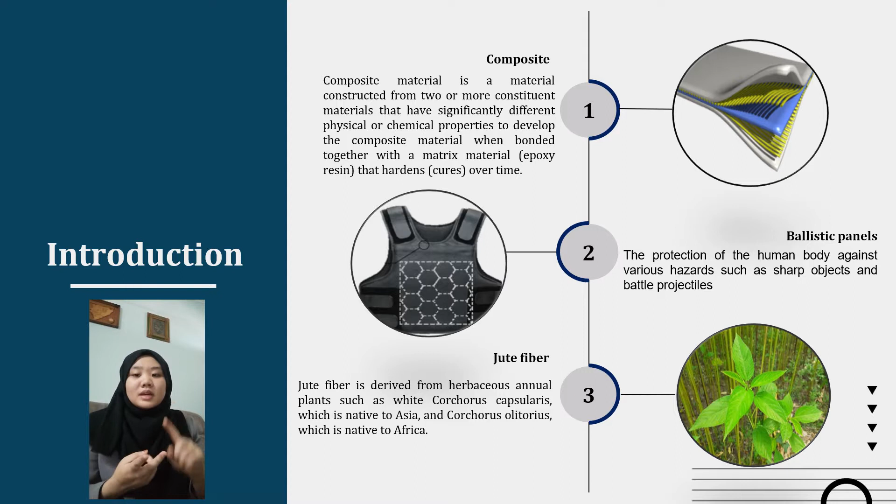Next is ballistic panels. What is ballistic panels? A significant amount of research has been conducted over the last several decades to develop lightweight and flexible ballistic materials for developing next generation ballistic systems, such as body armor with improved mobility and good protection against specific threats. As you all know, ballistic panel is a protection of the human body against various hazards such as sharp objects and battle projectiles.

Okay, next is jute fiber. Jute fiber is derived from herbaceous annual plants such as White Corchorus capsularis, which is native to Asia, and Corchorus olitorius, which is native to Africa. Besides, it is one of the low-cost natural fibers and presently the bast fiber with the maximum production volume. The growth rate of the jute plant is very high as it grows up to a height of 12 to 15 feet in 3 months only.

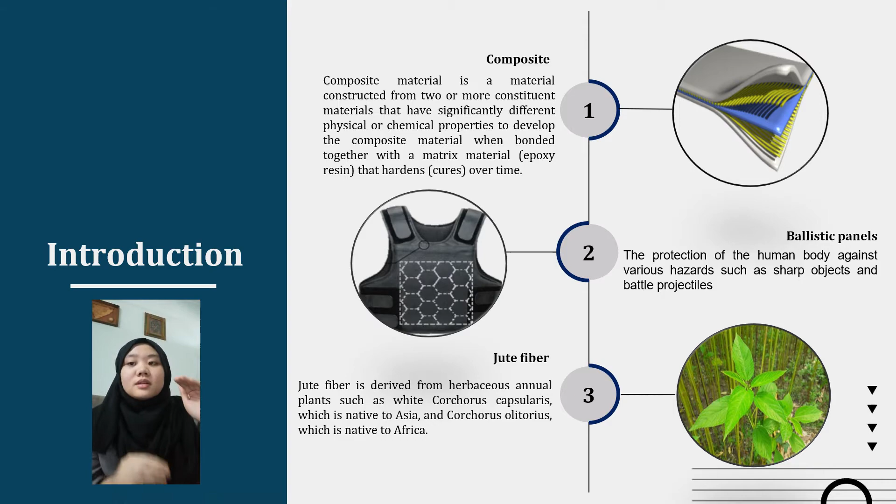Moving on to the problem statement, there are 3 problem statements that need to be focused on for the ballistic panels. First is the high usage of Kevlar fiber in ballistic panels, where Kevlar fiber prices will increase as petroleum prices increase. Second, the number of layers in ballistic panels. In 2022, Firouzi et al. posited in their research that generally 30 to 50 stacked layers of high-strength fabric are required to meet typical ballistic body protection levels.

There is also research by Ojok in 2020 stating that 96 layers were created to trap the bullet. 50 mm of aramid fabric thickness was required, which was substantially greater than the thickness required to stop a 7.62 mm bullet at the given speeds.

Lastly, lack of hybridization of synthetic and natural fiber. In 2018, Safri et al. asserted in their research that the hybridization process is one of the most common and effective methods for improving and strengthening composite materials performance in high velocity impact application.

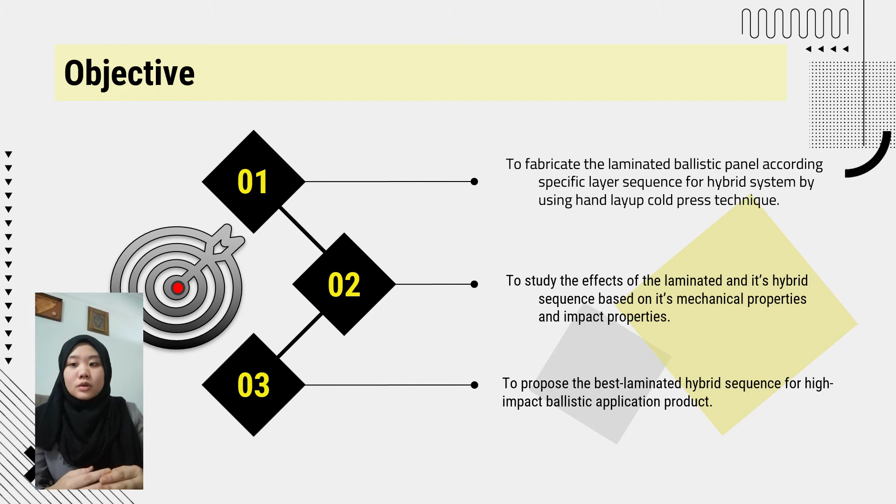Next, the first objective of this research is to fabricate the laminated ballistic panel according to a specific layer sequence for the hybrid system by using hand lay-up cold press technique. Second is to study the effects of the laminate and its hybrid sequence based on its mechanical properties and impact properties. Third is to propose the best laminated hybrid sequence for high impact ballistic application products.

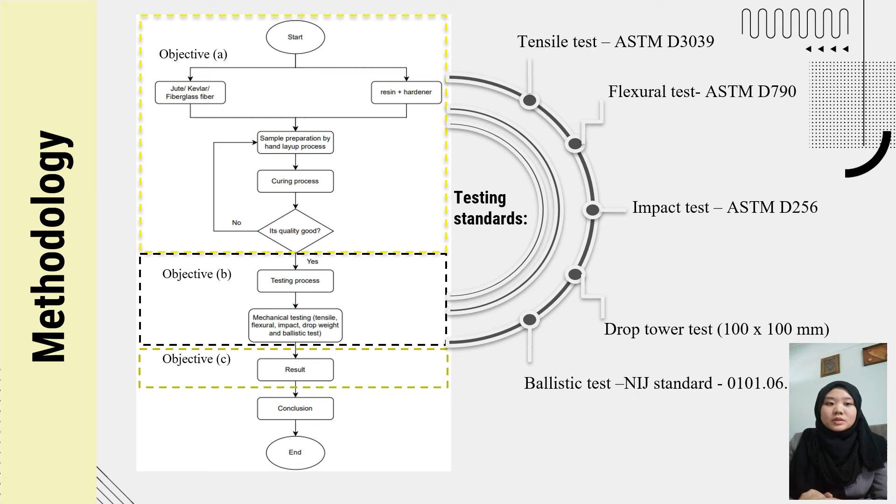As you can see, here is the flowchart of the methodology. There are some tests required in this research, which are tensile tests, where we use ASTM standard D3039, and for flexural testing we use ASTM D790. For the impact test we use ASTM D256, and for the drop tower test we cut it into 100 times 100 millimeter panels, and for the ballistic test we use the NIJ standard 0101.06.

Here is the methodology. At first we start with the preparation of raw materials, which are epoxy, jute fabric, Kevlar and fiberglass fabric. At the hand lay-up preparation, we will cut the fabric into a size of 28 times 19.5 centimeters, and then we use the matrix, which is the epoxy resin, and fabricate the composite using the hand lay-up technique with cold press. Then we test the specimen with impact, drop test, flexural, tensile and ballistic. Lastly we get the best stacking sequence for the hybrid laminated composite.

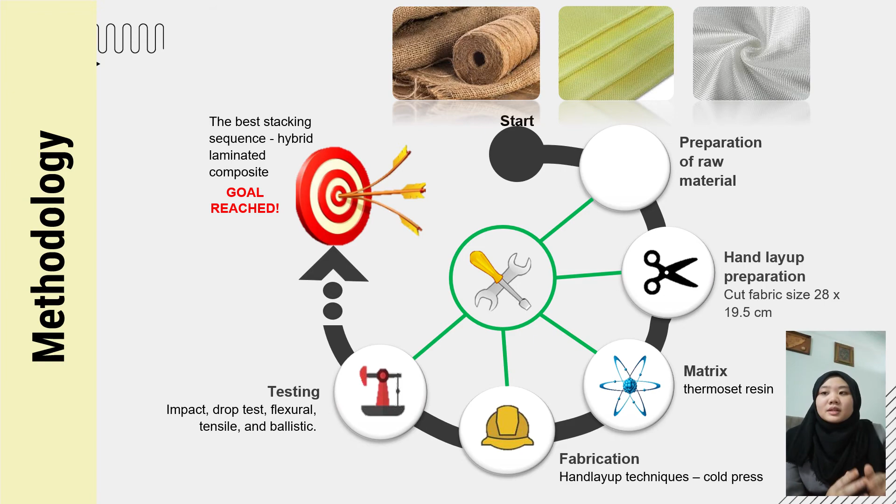Here are some of the selected literature reviews. Firstly, Shahzad found that the mechanical properties of the composite improve significantly after hybridization with synthetic fiber. Second, Firouzi's research found that only 22 layers of UHMWPE fibers are able to stop 9mm bullets at 357 meters per second. Thirdly, Manesh stated that it takes 50 layers of synthetic fabric to create hard armor panels. Fourth, in Rajole's studies, they found that jute fabric is more efficient than Kevlar fabric composite under the ballistic performance test.

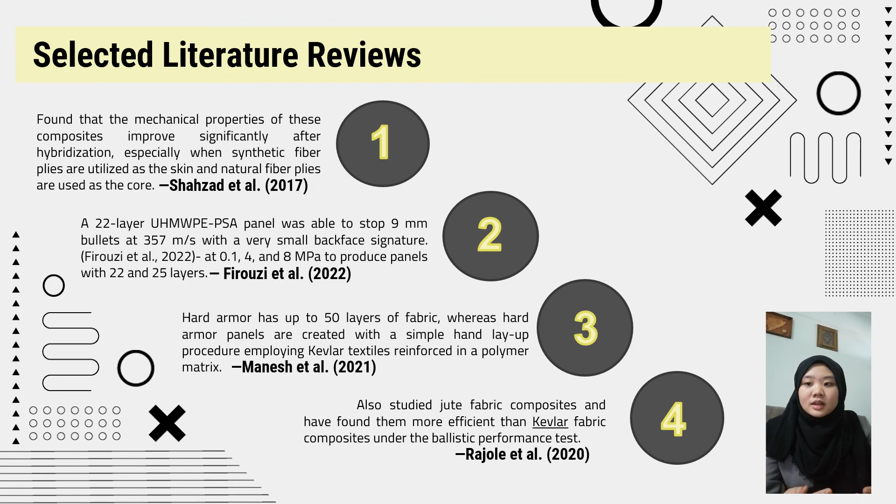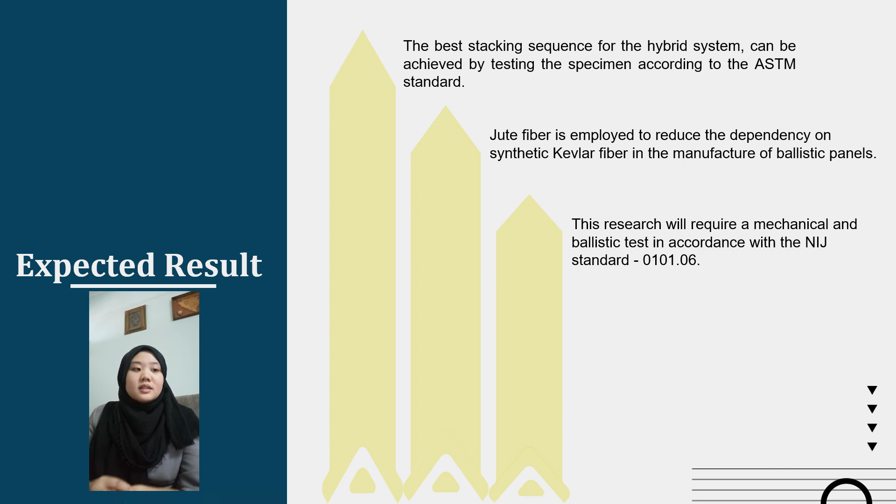To sum it up, the expected result for this research through the whole experiment is to get the best stacking sequence for the hybrid system, which can be achieved by testing the specimen according to the ASTM standard. Next is to employ jute fiber in order to reduce the dependency on synthetic Kevlar fiber in the manufacture of ballistic panels. And this research requires mechanical and ballistic tests in accordance with the NIJ standards.